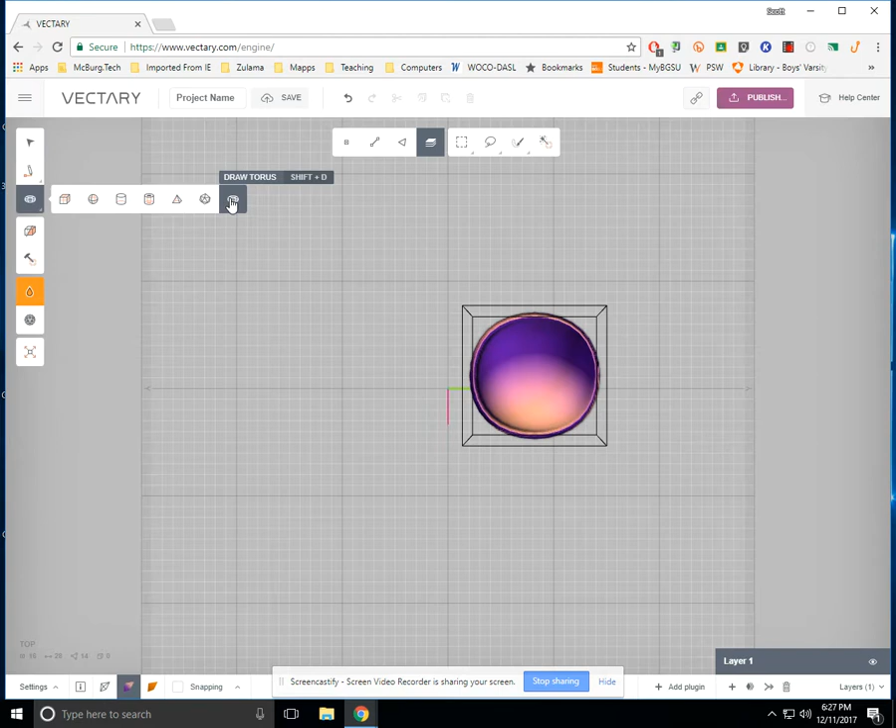Draw a torus in an overhead view, I'm going to pull what I think is a reasonable size ring. So I click and drag, and a reasonable size ring is what I'm looking for here. Come on, torus, get in there. There we go. I can always resize it in a little bit.

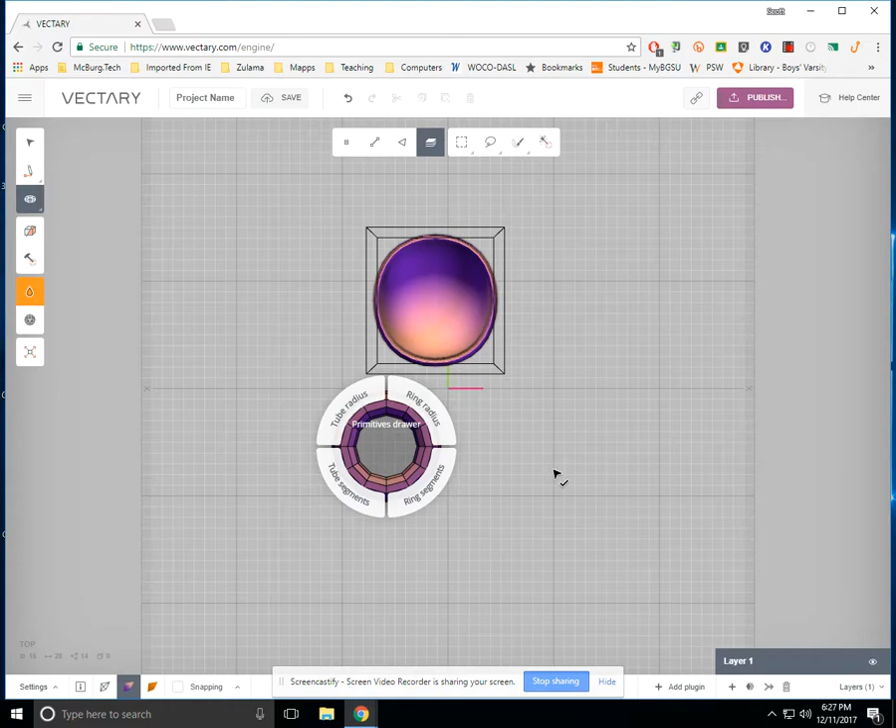First click determines radius. Second click determines tube radius. If you look at it and think either of those should be changed a little bit, you can click tube radius and put in another value. Maybe I wanted it to be 11 instead of 11.5 - you just type in 11, hit check mark. If you want ring radius to be a little bigger, I can type in 42, and again hit check mark, and it'll change those things for you.

So now we've got two things to do. We got to cut it in half and we got to put it on the cup. So first we're going to cut it in half, staying on this layer.

We go over here to the cut tool and click cut. We click and pull until we see a yellow line come through the middle of the figure. When we see that yellow line coming through what we feel is the middle, we click again. It'll ask if we want to split it. We say yes by clicking, and let's go ahead and put a little bit of a gap of 1 in there - we hit 1 and hit check mark.

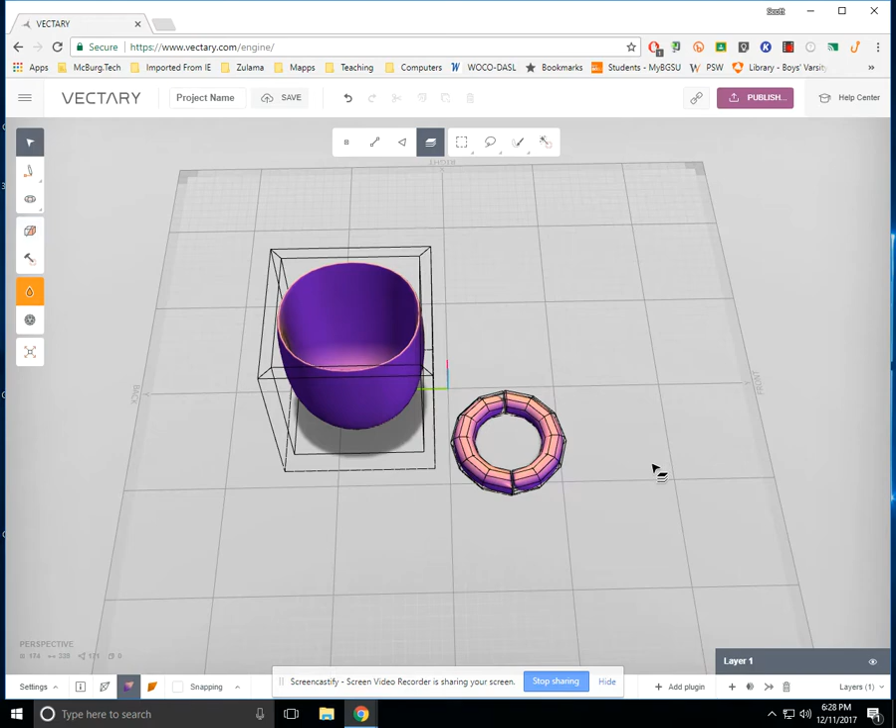Notice what that did - it drove a gap in between those two things. So now I'm going to delete one of them. We talked about this a moment ago in the last video. If we select faces, click on one face on the left and hit Control A, we've now highlighted the whole left-hand bit. If I go up here to trash, it's gone.

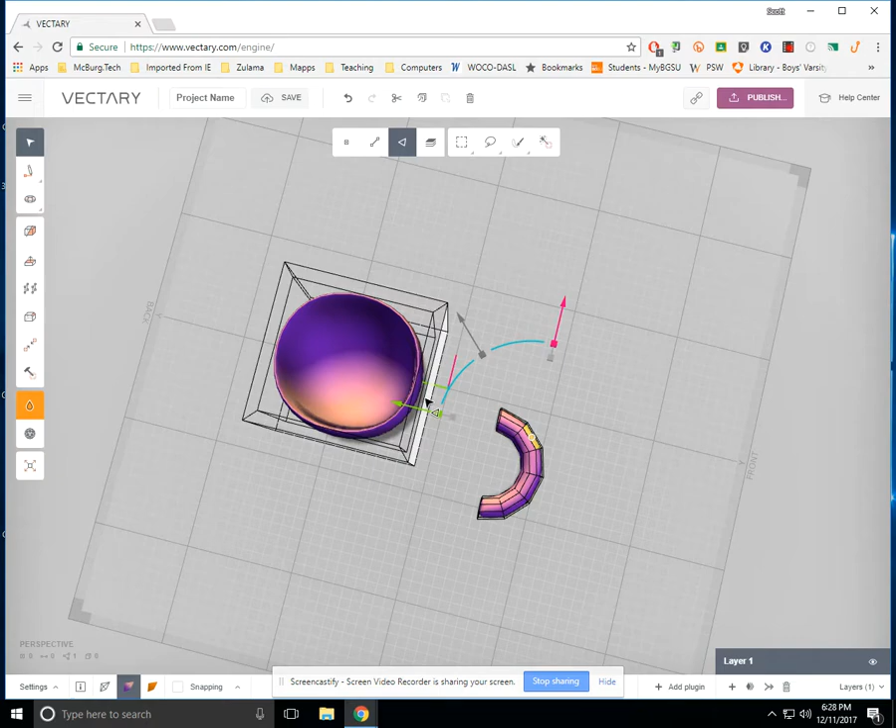So now I do the exact same thing. I select faces, hit Control A, and now I can move it all. This time I'm going to choose to rotate and move it. So I pick a value that looks good, and I say I want to rotate it up. So I didn't have the green one in that one - notice the green one didn't show up there.

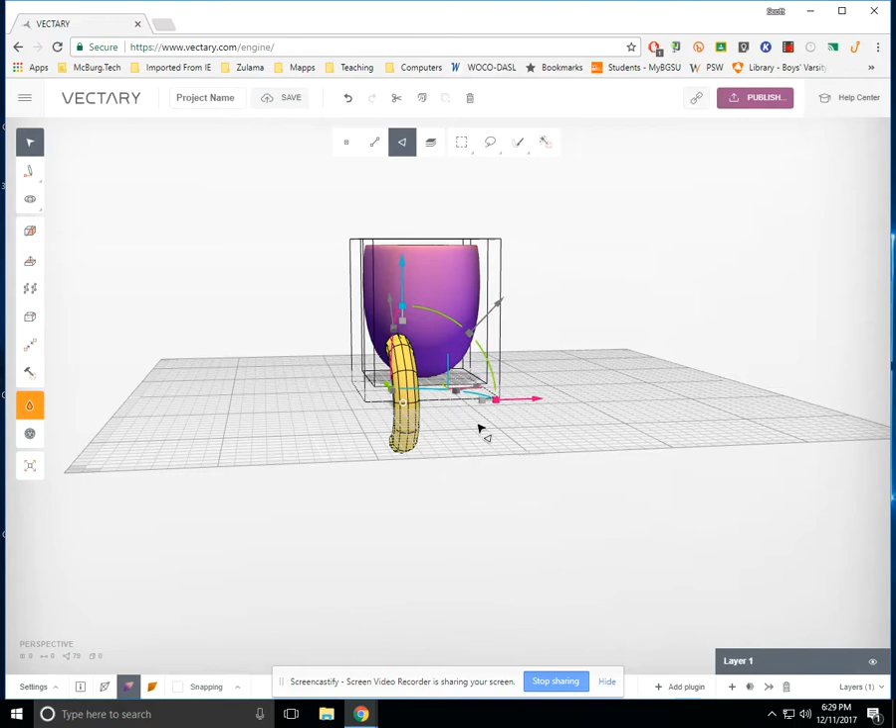So here, I didn't like these rotations, so I switched views, and the green rotation box stood up there, and I like that one. So I'm going to grab it and rotate it until it looks about perpendicular. I'm still not quite there yet, so I'm going to move it - over to the right by grabbing the arrow, and up by grabbing the arrow and moving.

Now I'm getting closer. Now I'm going to spin over to another view, and I might grab the green arrow now from here, and it's going to bring it in. I'm pretty darn close. I kind of like where it's sitting right now, and I just maybe want to tilt it a little bit more.

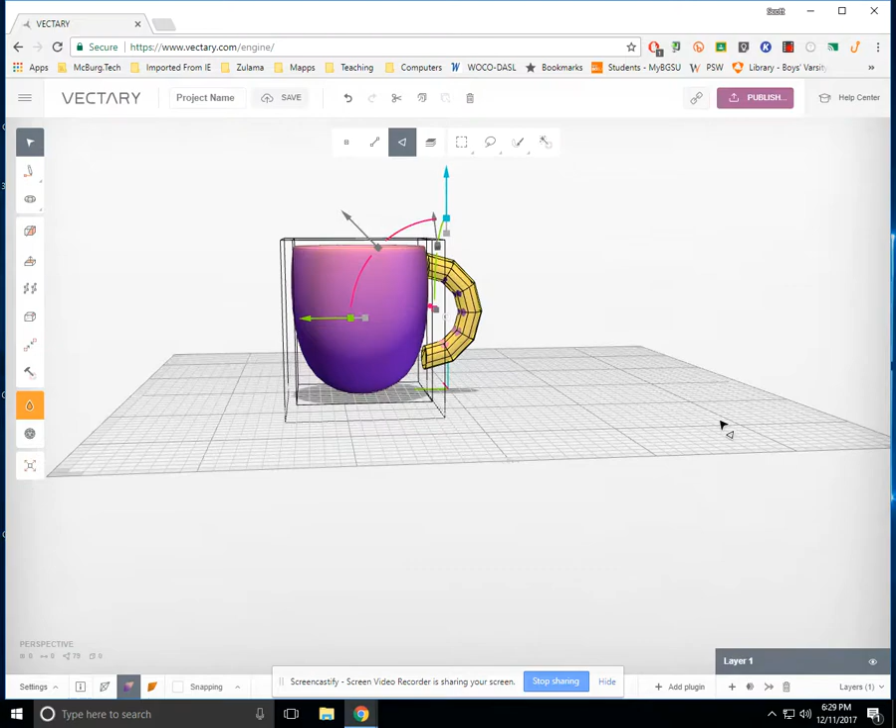So again, I look for whatever rotation shows up, and I like the pink one right now. See the pink rotation? If I grab it and pull it up a little more until it looks parallel, and then grab my forward arrow and move, looks like I'm going to bring that right in there.

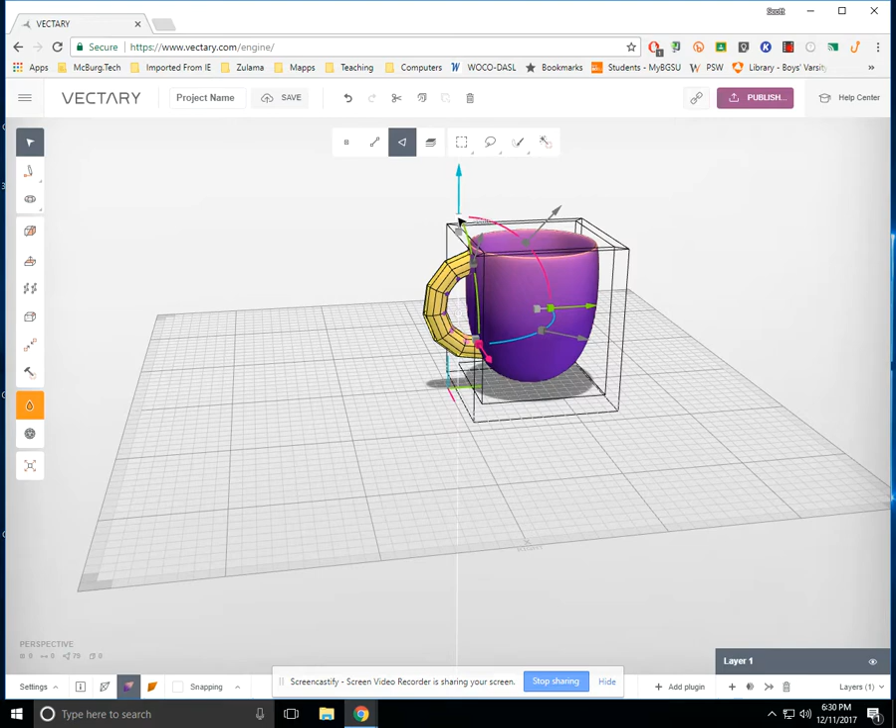If I don't like the size, please remember the boxes are size. So if I thought the handle should be a little smaller, let's look - this one says scale, and that would scale it up and down. This one says proportional scale, which shrinks the whole thing. So maybe I shrink the whole thing just a little bit. Okay, and right now I'm liking the looks of it.

So I can just click off, and now I can get around to coloring it. I'll go ahead and do that now. Again, this is all on layer 1. So I hit the color picker - maybe I'll go to some sort of that type of color.

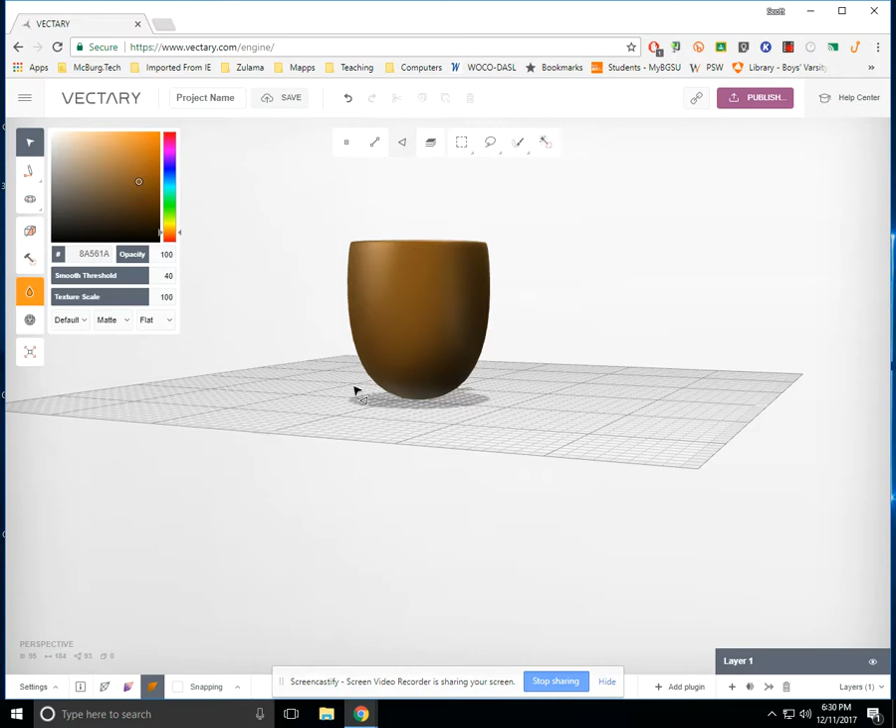And then I can change it to, I don't know, glass, shaded, wood, whatever else. I'm going to go to a glass mug for a moment, and now I've got this guy. Again, on color picker, if I want to change the matte or the finish or whatever else, 3D print - see what that looks like. That looks kind of fun. And I'll leave that. And there is a cup for you with the handle.